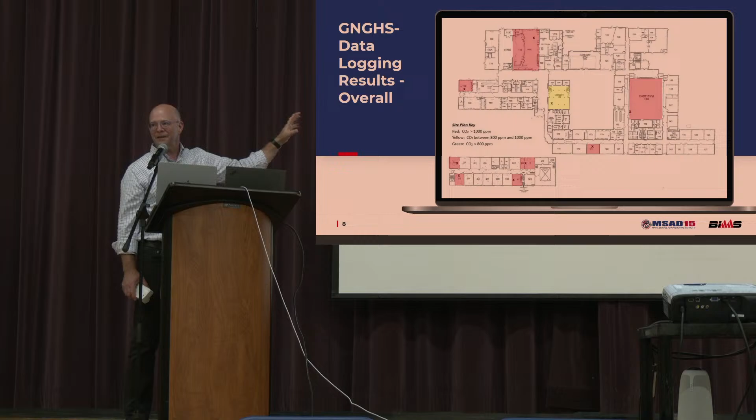So we place these on the walls of the rooms that you see that have a color. And in these graphics, I've used the color to indicate how high the carbon dioxide level got. Green, which you don't see any, is a low level. Yellow is sort of on the borderline. And then red indicates the carbon dioxide has exceeded the levels that are recommended.

Yeah, so at Gray-New Gloucester High School, there are unit ventilators. The high school has several different stages of construction. The first was in the 60s, but the bulk of the school was built in the 70s. And a lot of the systems that were installed then are actually still installed. So those systems are nearly 50 years old. Typically, ASHRAE publishes an anticipated life of these pieces of equipment, and a unit ventilator typically has a life of about 20 to 25 years. So you've gotten 50, which is great. The question, though, is how much longer do you expect to get use out of it?

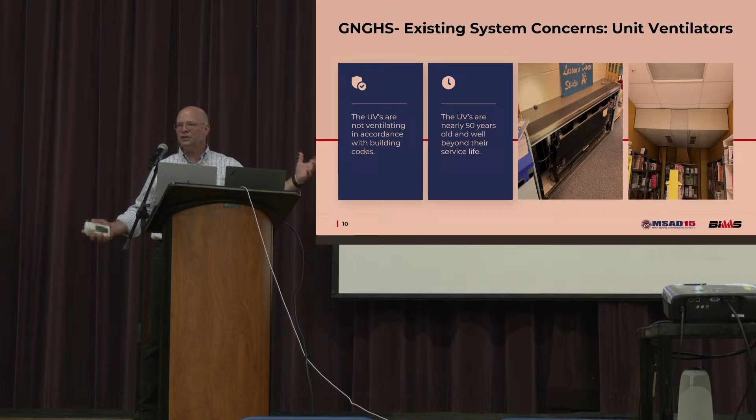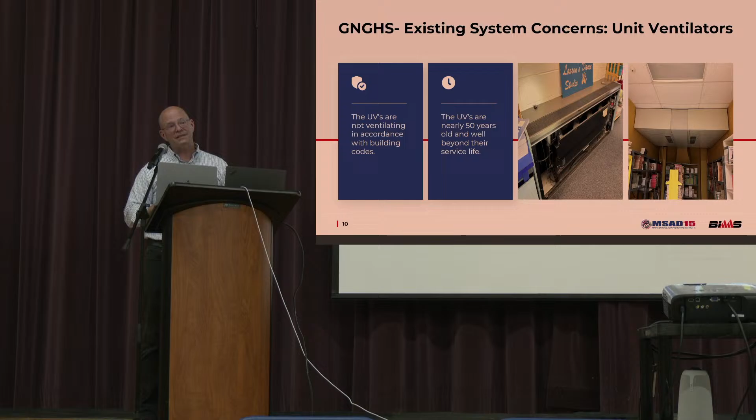And the other thing that's important is that we've measured the ventilation in these rooms, and the things are not ventilated. So we've got 2 things going on. One is the equipment's past its service life, but the other thing is that it really isn't working very well. And the other thing in the high school is we've got air handlers. So we have in the project replacement of unit ventilators, but also replacement of the bulk of the air handlers in the building as well, the ones that are nearly 50 years old.

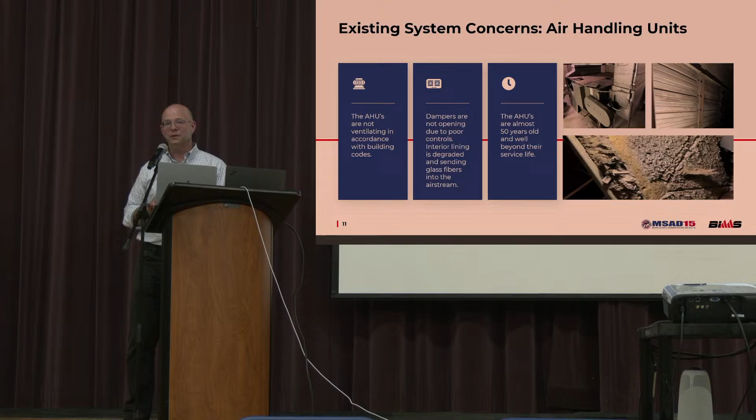And the last component is controls. We can put this great equipment in, but if it's not being controlled properly, it's not going to ventilate properly. So it includes controls throughout the building.

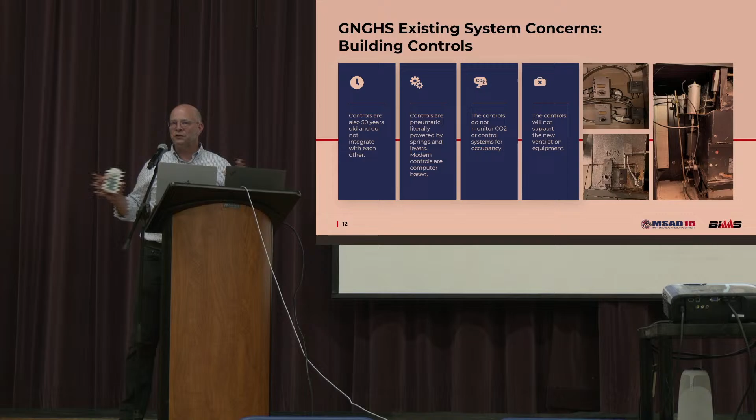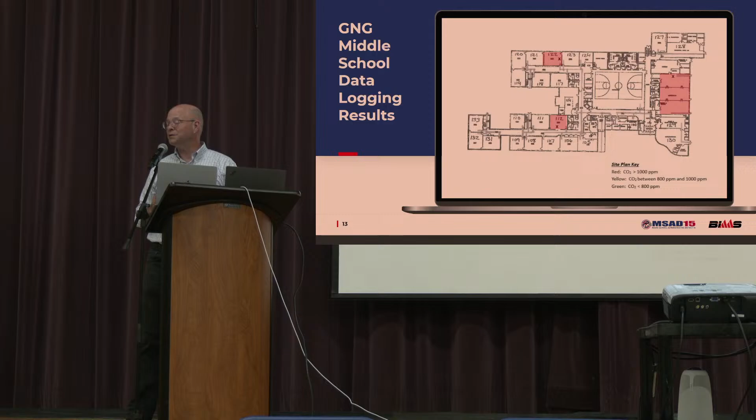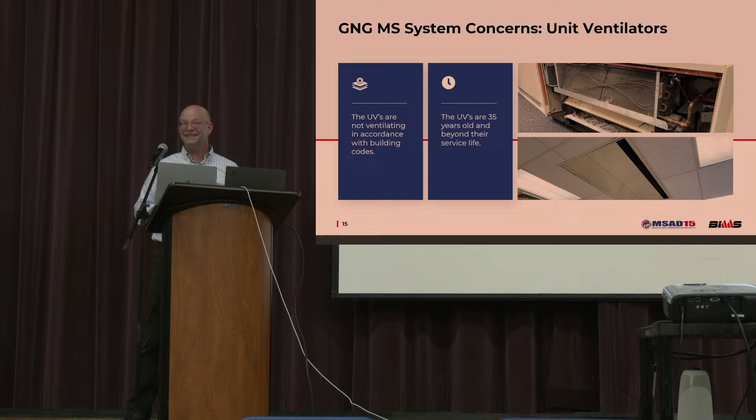Similar situation in the middle school. Middle school is quite a bit newer, but the equipment in there is still 35 years old. And you can see by the graph, we did put the data logger in there as well. And most of the rooms came up red as well. They were in the high CO2 levels. So the project includes, got another graph, just because it's exciting. But similar thing, unit ventilators will all be replaced. Also the controls will be replaced. And the air handlers will be replaced. So we have that soup to nuts.

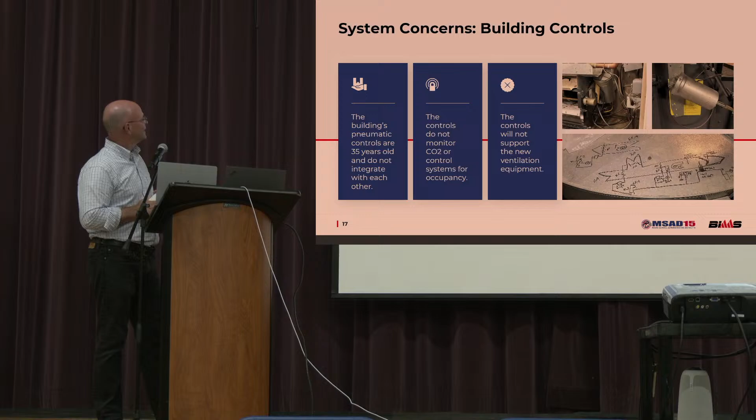So then on to Memorial. Memorial is a school that has 2 different basic constructions. One is kind of old, and the other one is newer. And what we found with the data loggers is that the ventilation isn't really good anywhere. So the project includes replacement of the equipment in the older section, and installation of new controls in the new

and the old sections. So you get new equipment in the older sections. The existing stuff is not so bad in the newer section of the building. We really felt like we could probably refurbish that equipment and it would be fine. So we've got replacement of equipment, new controls throughout, and then I think the gymnasium. Yeah, there it is. The gymnasium gets some air handlers.

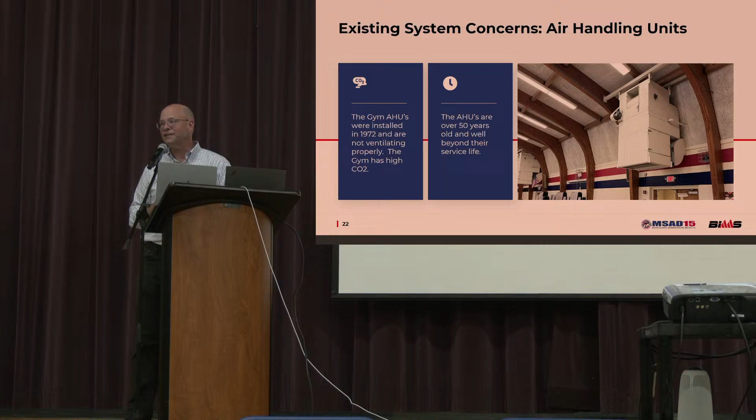And the other thing is the library right now has no ventilation in it at all. So we have in the project installation of ventilation in the library. So when it's all said and done, you'll have good controls, you'll have good equipment, and it'll ventilate well.

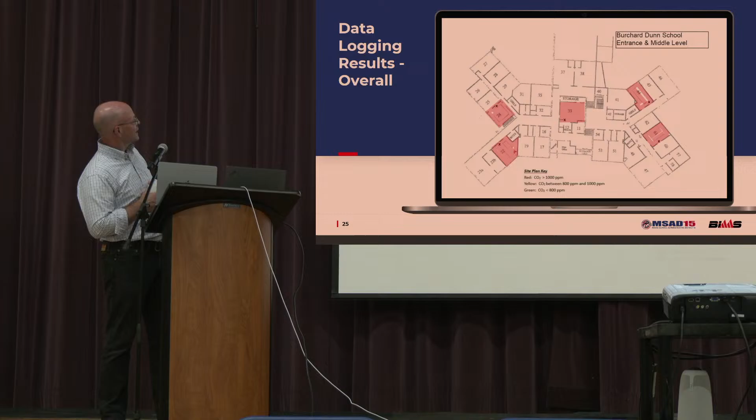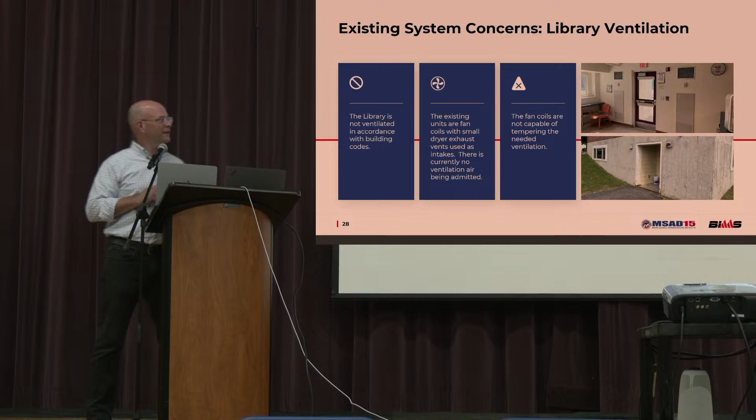Okay, last is Dunn. Similar situation we found in Dunn, high carbon dioxide levels for ventilation. Another graph. So in Dunn, the library also has a ventilation system, but it doesn't work. And I don't honestly know how it ever would have worked. It's not effective right now, so there's a new ventilation system going in the library. And new building controls throughout. And that's it, I'm gonna pass it back to

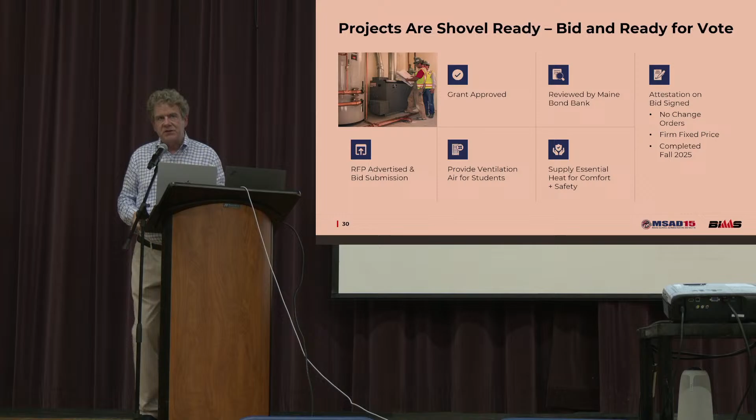Tom. So as you can see, numerous schools, numerous measurements, all tell the same story. Old equipment, and when we think about that equipment, you know, the ASHRAE life is typically, depending upon the device, 20 to 25 years. And you've gone beyond that, which is great. That shows consistent maintenance, and as what happens here in Maine quite often, we make things go longer. We hold them together with duct tape and baling wire, right? But we're beyond that point.

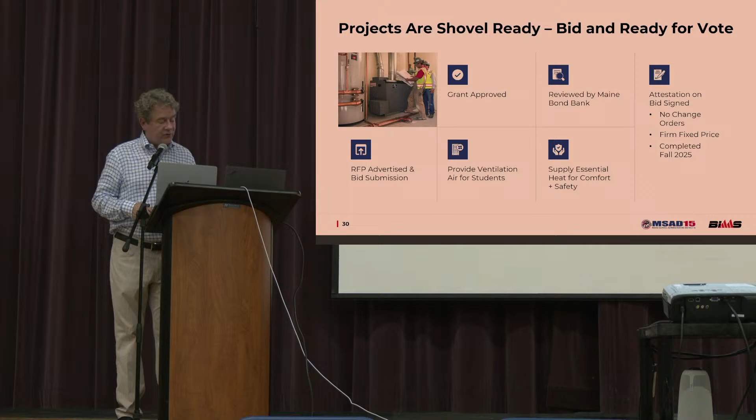And so with that, I bring it back to this slide. And I bring this slide back to you because it is an opportunity. It's an opportunity that is a once in a lifetime. We were fortunate, our same grant writing team, to go ahead and win other grants at other districts. I'm pleased to report that in both those districts, this bond project passed by a very, very wide margin, even in some disproportionately poor districts.

Again, it's something that brings the community together. It's absolutely the lowest cost for the taxpayer. Use other people's money to pay for the improvements. And the other people's money in this case is the state of Maine. So, a lot of information in a short amount of time, partly because of weather, partly because of what else you have to hear. But maybe when you go home, if you could just take these 6 takeaways: these are absolutely necessary critical infrastructure projects.

Absolutely necessary. There's no frills, there's no thrills. This, besides ventilation, provides the heating air. If it fails, something could happen. A school could close, a wing could close if you don't replace it. The projects are bid and they're shovel ready. So I can't speak for the other projects, and I'm sure they are very fine, but these have all been bid out. The contractor is ready to install. We're looking for the community's nod and the board's nod.

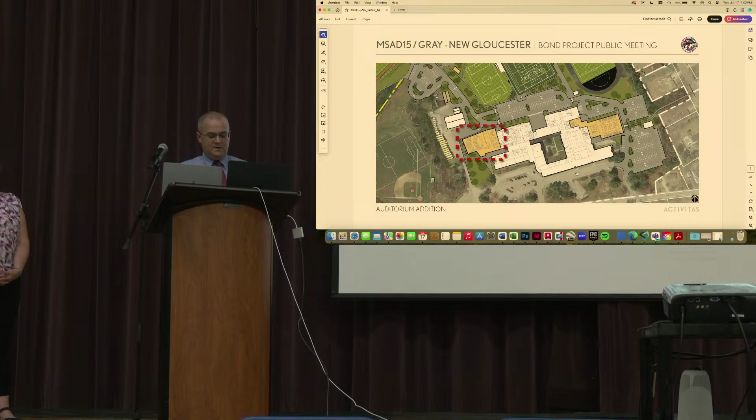I'll just jump right into things here. So here's an overall image of the building. All these images are on the boards in back if you want to look at them afterwards. But the idea here is adding on to both sides of the building. Some of that has to do with proximity to existing space. So on the right-hand side, adding on to the gym side; on the left-hand side, there's already the performing arts and music aspects, so adding on here makes sense.

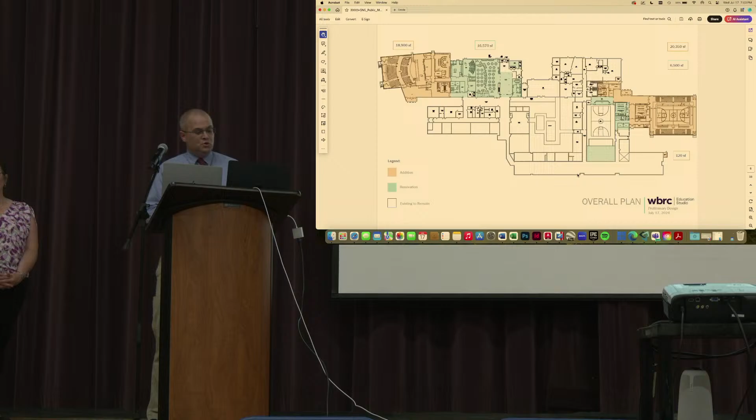The other thing to keep in mind is adding on with these components on these sides is a lot easier to do while the building is still operating. Rather than trying to completely overhaul the spaces, these additional works are going to take time. We want to make sure the school can still operate while these things are happening. So big picture, the pieces in tan are addition areas, and what's showing up in light green or blue is what we're looking at for renovation areas.

This is the auditorium addition that we have worked through. We've had meetings with the band and chorus folks, talked about typical performance sizes, how many guests you might have. So right now this is seating for 450. There's the entry area so you can close the rest of your school off during an event after hours so that just this performing auditorium space could be open and used after hours.

There's a stage. We measured the existing stage. It's very comparable to what you have existing, except right now you're also having some storage back here. So getting that stage... to be pulled off, but still in proximity to where it needs to be. There is a new band room that has band instrument storage along the perimeter, so maximizing the flexibility of the space, but allowing students to have the ability to store their instruments right in the space they're using them.

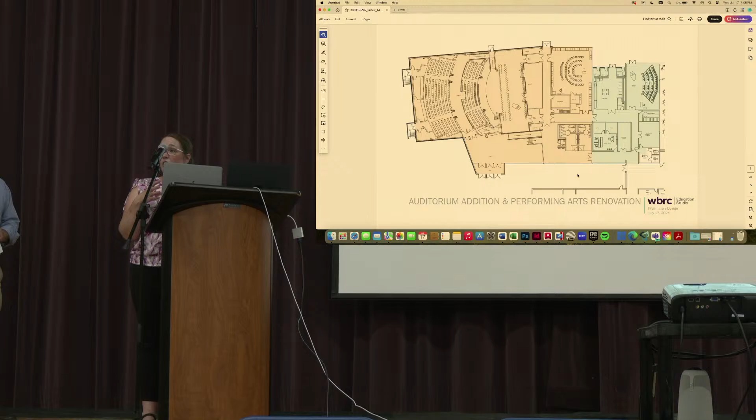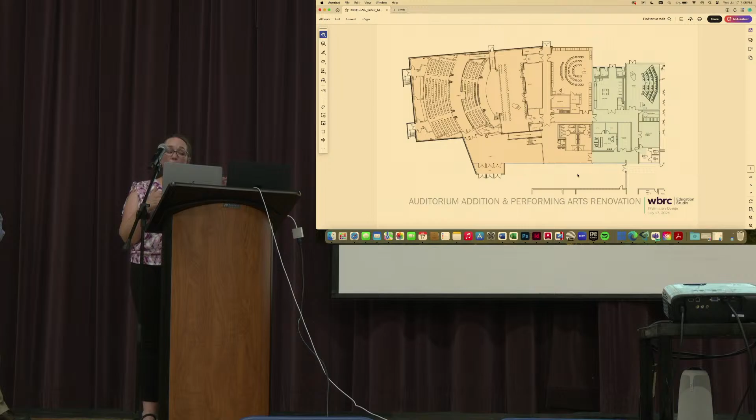And then you have a couple of restrooms that are used for changing and dressing space. It's not adequate for the number of kiddos that are in the theater program. So we've got a space next to it, and originally we had multiple small rooms. We've left this as a flexible room that can be used for costume storage, it can be used for additional changing space, right next to those existing bathrooms that are already in place. And then we've also included an office suite. We have a couple of spots that are going to be displaced when we start looking at renovations in other areas of the building that you'll see as we go through the floor plans. There's a small office suite in this area as well.

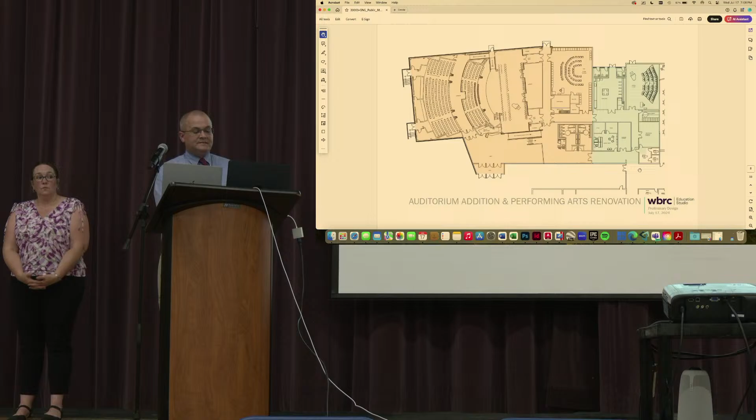And just to orient folks a little bit, this stage opening you see right here sits right here. So that's actually going to be infilled to kind of give you an idea. We're starting renovations right back of this as we move over. So the other nice thing that we're looking at is a dedicated entrance for the auditorium too. So after hours events, we'll be able to close the wing off from the school. So for after hours events, people can go right in the auditorium. You don't need to worry about them migrating through the school building for those events.

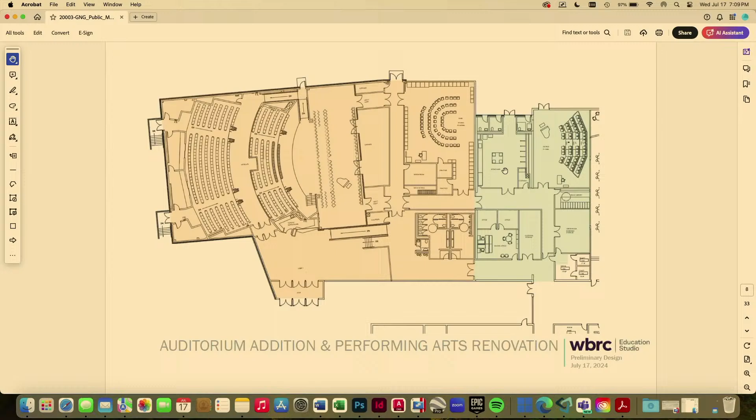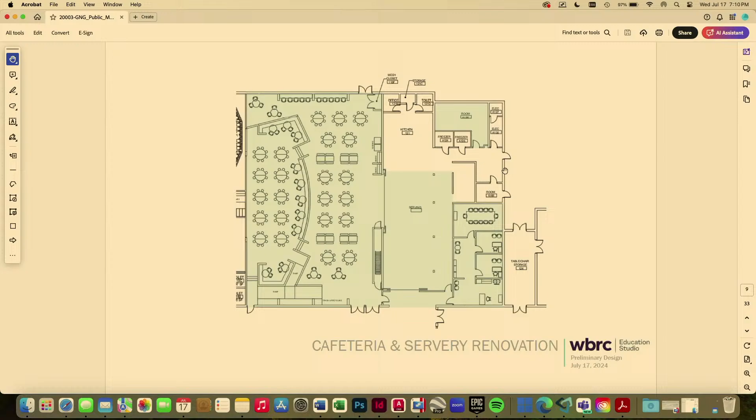So then kind of moving over to the renovation side of this wing. So what happens with this space as we build out the addition, right? So this space right now is really serving as your cafeteria, your auditorium. It's a multi-use space. I don't know if folks know this, but originally in the original building, this was part of the gymnasium. So this space is serving things that it really wasn't intended to originally. So we'll walk through the plan here of how we're looking to renovate this space, but some big pieces just to orient you.

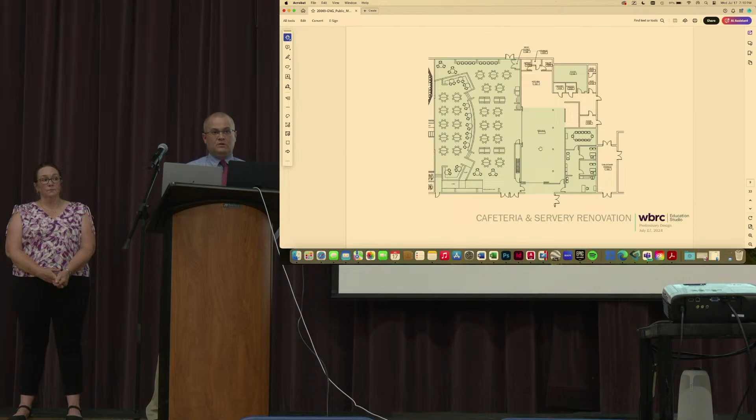So here's the entry doors right now. The thought being is this is going to be the new exit for the cafeteria. We're going to completely open up the wall just on the other side over there to create a new serving access. I'll get into a serving layout here next. And then we'll open up the full wall where you see those 3 doors there, completely open that up so serving can then have better flow into the cafeteria. In addition to bringing in some real daylight here, once we open up this piece here, really bring in some windows and some natural light into this space as well.

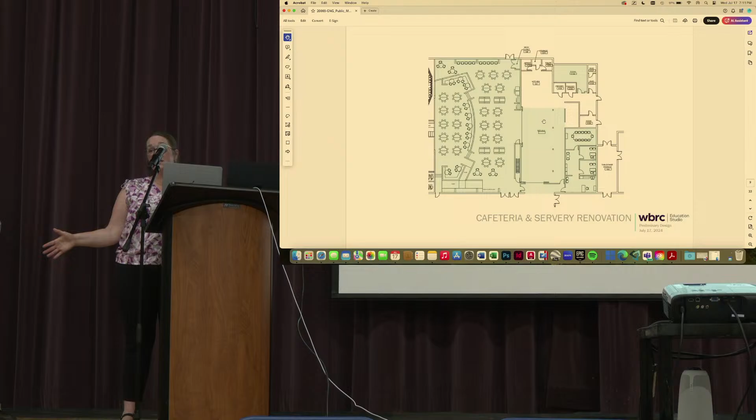So again, this has gone through a lot of iterations and talking about use of space and how much do we leave existing, how can we best use the space that you have. So basically the rest of the wood stage that we're sitting on beyond as well, this will come out, but we'll open up more space on the floor for seating. The idea now is to leave the half wall that you see with the built-in seating, but to really be able to use it as seating. So what you see is a lot of opportunity to get a choice of where students sit. So we are showing a lot more furniture and tables set up than what is currently in place.

Adding tables along the bench, so it's kind of cafe seating. We can have some loose chairs around there also. That gives some flexibility on how to set that up, and students can sit on the bench or on tables. Showing some cafeteria tables that have attached seating. You have some rectangular ones that are usually set up here on the stage. Adding some round tables are great for conversation. The attached seating allows facilities to move those tables out and clean up or set up for a dance or anything else they might have going on in here.

They move quickly. And then adding some countertop seating, if we're able to add some windows on that exterior wall, you give students power, you give them some daylight. It's a pretty popular setup to be able to sit at the counter. We can make some of these tables high, some of them low, but just giving some flexibility to students. I think that's it.

Yeah, so just as mentioned here, as we're looking at renovating this space in here, the leftover space here, again, we're going to create another office suite or potential office space to look at space for programs that are being potentially moved or displaced as we do some renovations throughout the building.

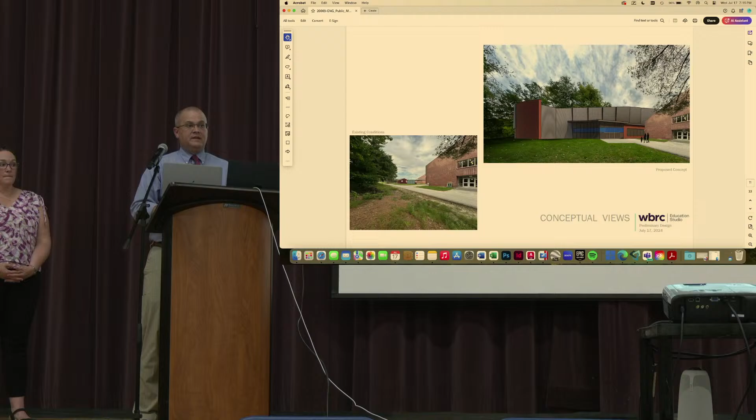So some things we started to take a look at what the auditorium could look like, right? We're at a very early conceptual phase here, and this is an idea and opportunity to get some feedback. So down here at the bottom left is kind of the image of the two-story classroom wing currently. You can see the end of the band rooms back here now. These are the out storage buildings that are back there. So this is where we're going to come off the wing.

And these are very early. We haven't brought in the site work yet that Ben's been working on. We're giving you an idea of how the massing will work with what's there currently as you kind of look down this sidewalk that's there right now. How the massing finally is resolved, we're still kind of looking at that. But the thought process being mainly we're having this dedicated entrance for the auditorium.

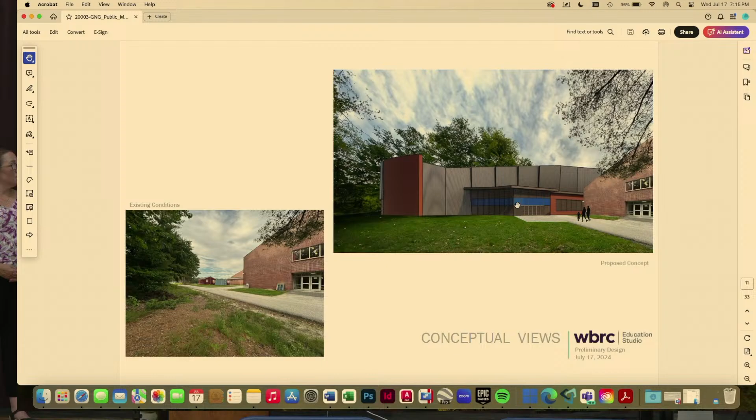Have some glass elements there, maybe look at an opportunity for pulling in some of the school colors, potentially bringing in some blue glass to give it some highlights, and then look at some opportunities for some different types of materials. You already have some metal panel around certain aspects of the building, and then you have some brick. So pulling in on those and making a dynamic space that says something different's happening here, right? We're just not going to make a big box and have the auditorium sitting here, but really make something that's a little bit more dynamic.

And the reality is just alternating these panels a little bit as you go across. This isn't a high cost finish to do this, but it really gives you an opportunity to create some flexibility on the space, to give it a little bit more interest visually, and to say maybe arts are happening here, right? So this is a space where you're coming in to see performing arts. And the opportunity for display of art as well. So inside the lobby space, display of artwork, and potentially even ceiling mounted artwork as well.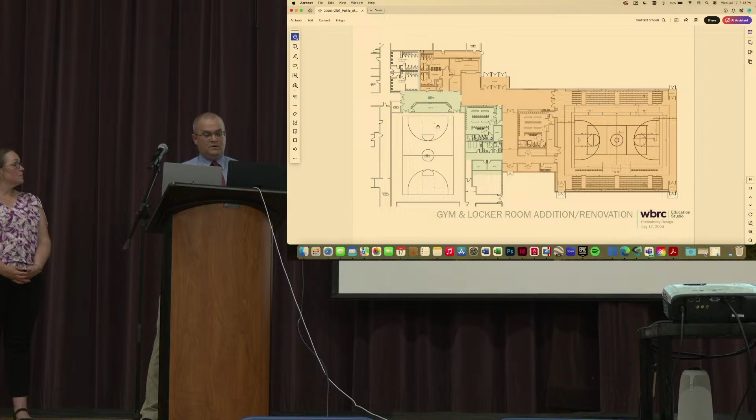So part of what we need to consider is how we let folks know that there is an entrance here, right? We've got this new gymnasium, but people are parking to the side and maybe to the back. So we do have a new vestibule. We can talk about whether we can have some lettering or graphics, or if that's lots of glass, just to have entry so folks know where to enter the building. Not always easy when you're coming for a winter basketball game. So we'll talk about some kind of identifying factor to get into the building. We have connected the new lobby as you're coming to get to the new gym to the existing. So this is basically your existing lobby outside of the current gym.

Creating a little bit of dedicated storage. When you go in that lobby right now, there's a lift, there's tables, there's things that you store there. So get that behind some closed walls and doors. Reintroducing the display. There's lots of trophies and things on display there, so we want to make sure we have lots of space for that. We'll be able to still use the existing bathrooms if we need to access those during games, if there are multiple things going on at once, but also adding more bathrooms because we'll have more seating with an extra gym. When there are gyms, people will come, so it is possible you have multiple things going on at a time.

Relocating concessions, so there are some thoughts about what the existing concessions could be used for. That's not going away, but adding concessions locations near the gym so that kiddos that want to go and get something at halftime, they can. So this is the new concessions here. This area here is renovations, so we would have one of the new locker rooms be in a part of the existing building. It would be renovated. These are football-sized lockers, so they'd be large, with 2 locker rooms that are the same, that way they're the same for home or visitors.

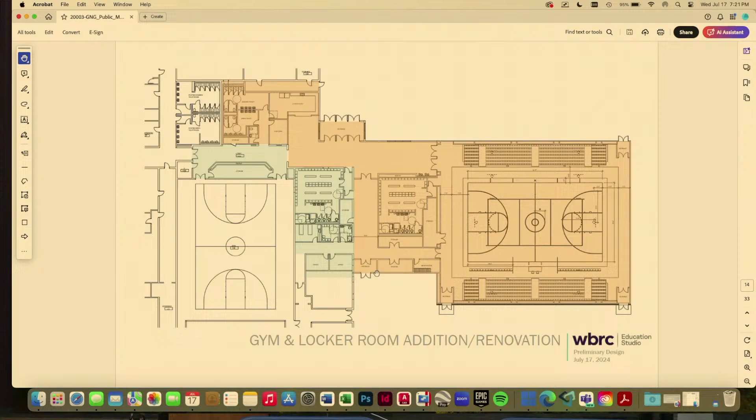And this would also allow us to have a low area over the new locker room where we put mechanical equipment to properly ventilate those locker rooms and the gym space. We can have that on the roof. And then we have the gym. And the gym, we've really worked hard to right size. We actually have brought this down from initial design work where we really are trying to right size.

We have seating right now showing bleachers for 700. We have 350 on each side. And I think these are really right down to the NFHS guidelines. So it's really the space needed to get that basketball size court in here. There is also the potential that you take your existing striping on your existing court and you can put 2 practice courts side by side. So if you want to have it striped and painted to have 2 practice courts with a curtain between, we also have room to do that in addition to the standard court paint.

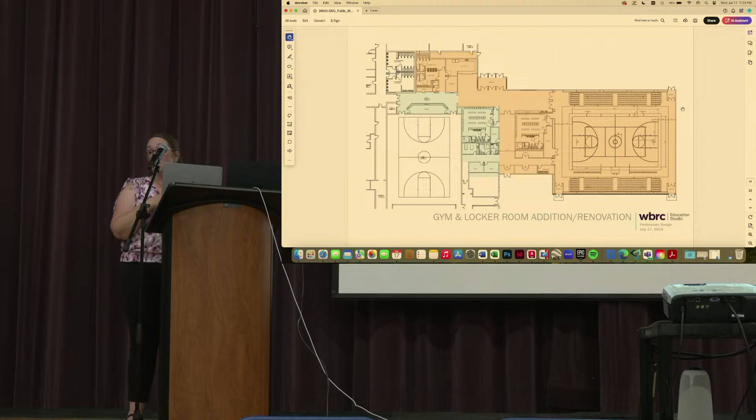And I think that really kind of hits the nail on the head, right? And really the flexibility that Jen has mentioned with those courts. So we have a divider curtain down the court here. So during the school day for PE, the amount of flexibility you have for running PE programs in the existing gym and this gym helps again with flexibility of schedules. And then at the same time, when you come to practices, you don't have to worry about the boys and girls varsity teams and who's practicing when. You can just alternate between spaces. You can have multiple practices happening at the same time. So huge scheduling plus all around.

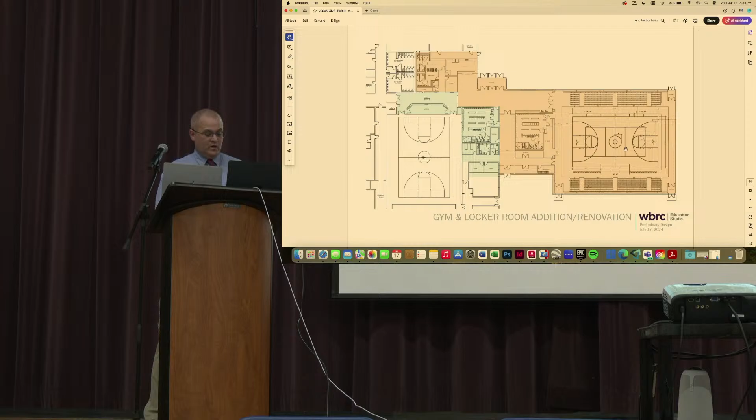Again, between the 2 ends of the building, creating another community asset really. These are spaces that are going to help the schools, but just think of the possibilities here for the community at large for things that can happen in either of these spaces outside of school hours. And then what does this look like, right? So again, this is our first approach rendering at what this volume would look like. Really, I want to give you an idea for the scale of this in relationship to the school building.

So the bottom left here is the existing school, the classroom wing towards the end. You can see the shop space over in the back. So in the proposed, here's the classroom wing, and the scale of this is really being set up based on height requirements for gym, but also volleyball. Making sure you have those overhead height structural clearances in place so you meet the requirements for those sports. But then that's also at the same time giving something that, as you're going past this drive, looks attractive. So people coming to events say, okay, there's the gymnasium, that's where we need to go.

Making sure we get an opportunity to pull some glass into this space as well. I want to have translucent glass or probably something that's frosted so it's not interfering with folks shooting foul shots or anything like that. But then at the same time introducing potentially some nice roof overhangs to provide some shading there in the summer, so eliminating some of that heat gain you have from the sun. We would be having more mechanicals in this area and climate control in this space with wood floors of this scale. And it's really nice to have climate control in there to help with that space in addition to helping when you have events going on in evenings like this.

Turn things back over then.

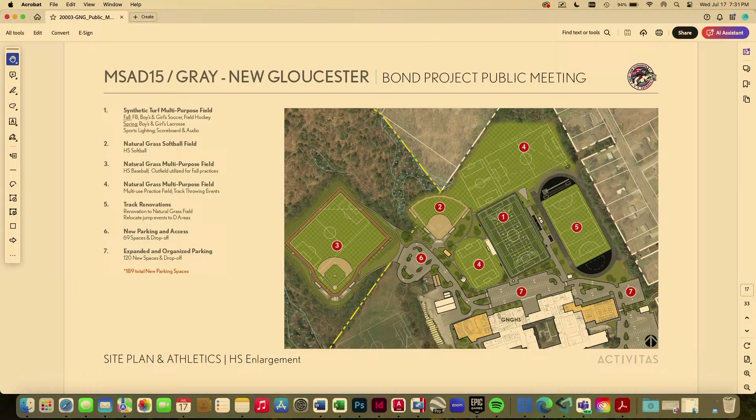Number 4 is, again, size. It's a multi-purpose natural grass leftover space right in the middle of your campus here. And we're treating this as your athletic quad, where you could use this for PE, you could use it for practices. It's sized for a short-sided soccer pitch, like a 6v6 size field. So again, a ton of flexibility with this leftover space. We thought best to try to find as many programs we could put out there. What's also great about this is that you start to create these really nice pathways to cut in and around all the different programs.

Somewhere in that vicinity, we're currently showing a new concessions building. Right now it's closer to the parking lot; there's a lot of flexibility in terms of where that finally goes. But a new concessions building, concessions, kitchen, bathrooms, all the things that would support the center of all of your activity. We're also showing some improvements to your existing concessions building over by the track. So there'll be some modest improvements to that as well, just so that you have something over that side of the facility if you had multiple events going on at once.

I will also add that this field at number 4 is in a perfect location for reconstruction of the school's septic field. Your current septic field is very, very aged, ready to be replaced. That seems to be an opportune location to rebuild in place. It's in close proximity to the concessions building, which we should have a very easy septic connection to. I think there's a lot of pros to having that location for that field.

In terms of parking on the backside, I told you about the 69 extra parking spaces in 6. If we circle around the rest of the site, you'll see that we have close to 190 new spaces proposed for the entire campus. A pretty big improvement to what you currently see out there with your events right now. We're maintaining your current main line of travel for vehicles. The yellow dots designate that pathway around the school, but it really comes in from Libby Hill, circulates around the new gym, takes you down the backside and then back to that 69 car parking area in the back, with a few different pockets of parking surrounding the spaces.

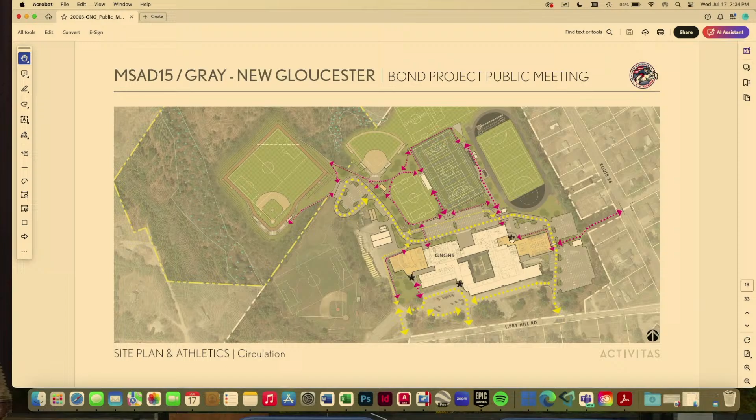So just real quickly, I want to go through, we've been looking at this from a cost point of view. We've been getting information back from a third-party cost estimator that we use to really dial into the numbers, make sure we're getting good numbers before we put anything out to referendum. So here's where we're at and what we're looking at for cost, and we've kind of broken these up following the state of Maine template for school project budget.